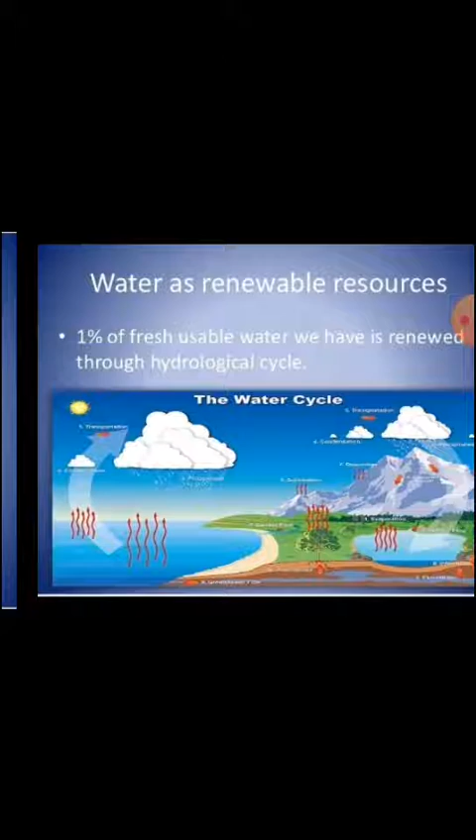If water is renewable, then the questions are: why do we talk about water scarcity? Why should we conserve water? Why is water management important?

Growth of population - certainly with the increase in population, the use of water will increase, as in domestic use, for production of food, and for other purposes like industries, etc.

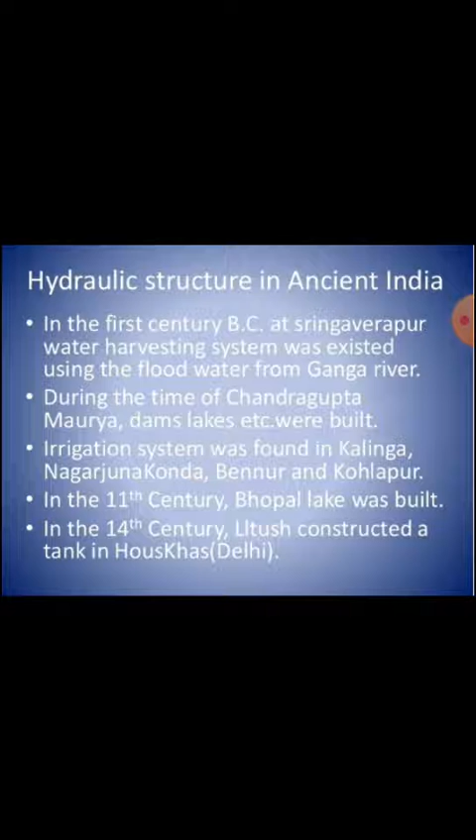Water harvesting in ancient India and water conservation - the images have been provided in the video to give an insight into how water harvesting was done in ancient times and how water was conserved.

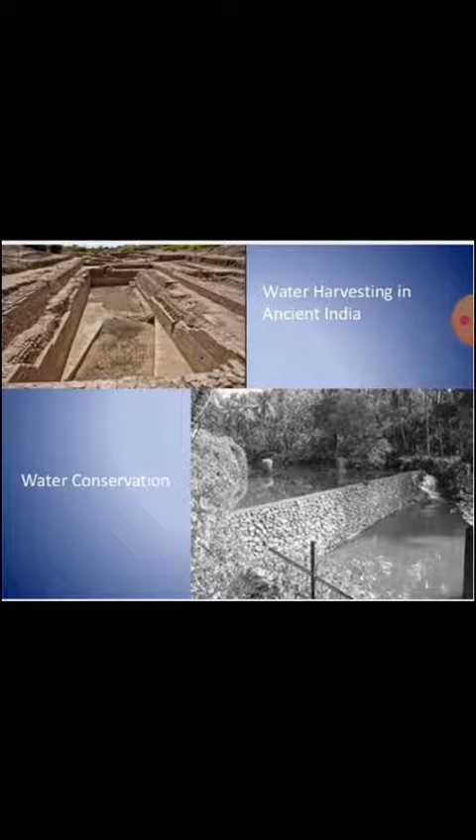Continuation of this traditional way in modern India can be seen by building dams in most of the river basins, about which we had already learnt in the previous video on dams.

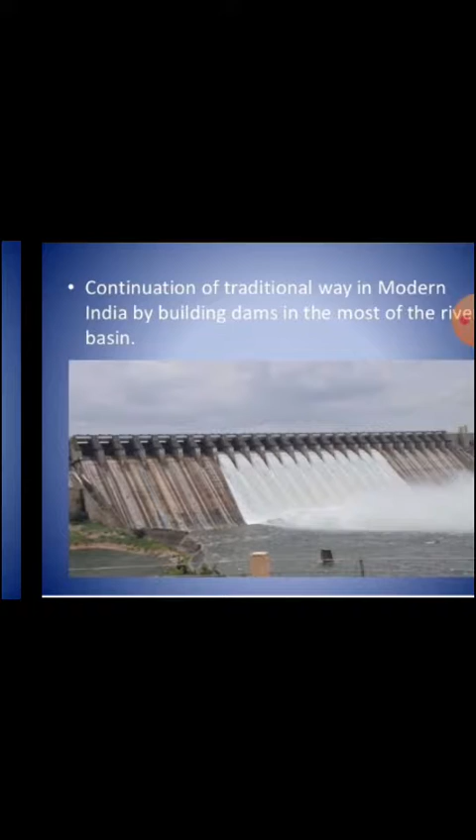Dams are multi-purpose projects traditionally built to impound water and harvest rain that could be used later to irrigate agricultural fields. At present, dams are built for multi-purpose usage, therefore it is also called a multi-purpose project.

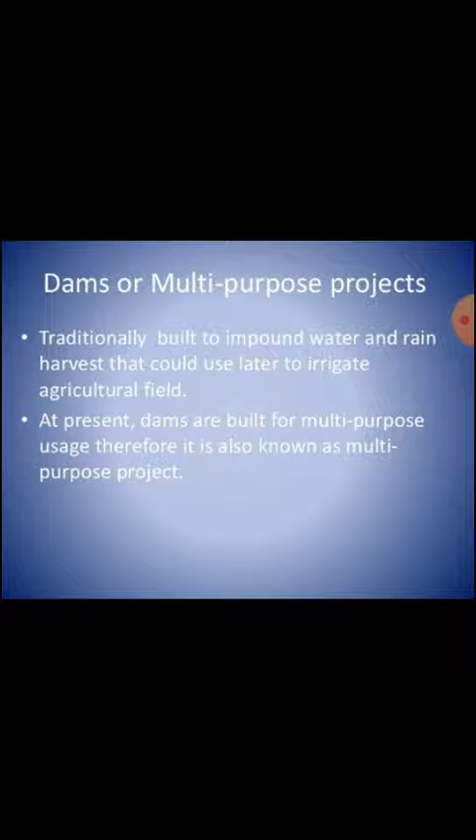But the question arises, what are dams? It is a barrier across flowing water that directs the flow, often creating a reservoir, lake or impoundment.

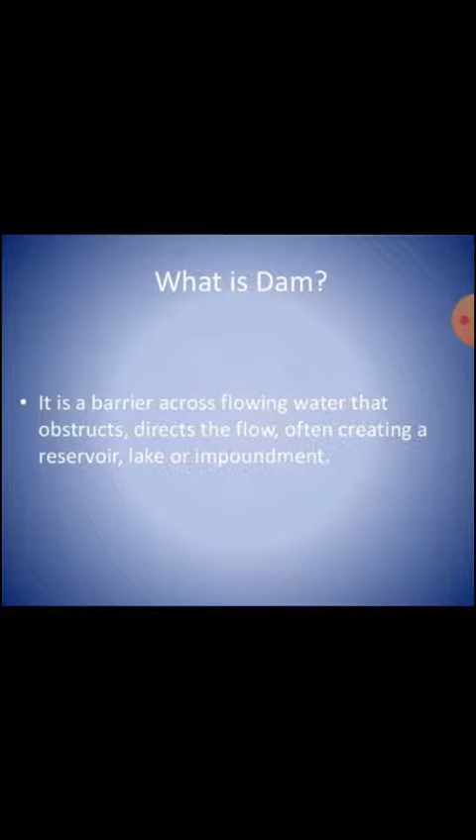That is, it is an artificial monument which is created to obstruct the path of a river and to use the water of that particular river according to our need.

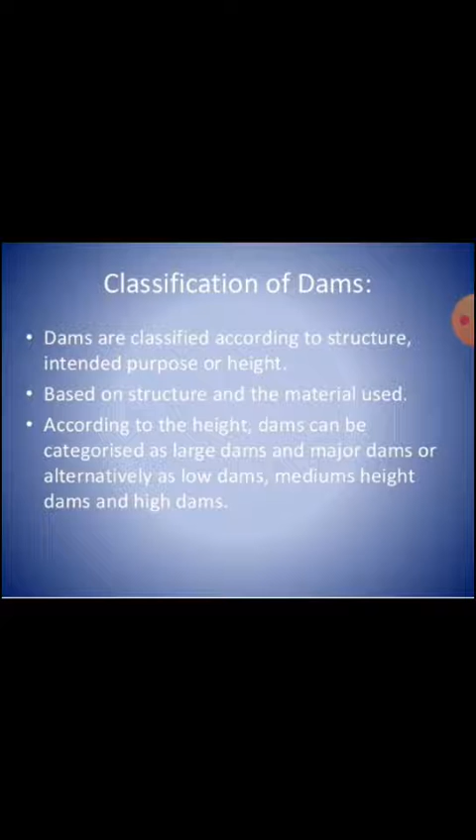Now, dams can be classified according to structure, intended purpose, or height, based on structure and material used. According to height, dams can be categorized as large, major dams, or alternatively as low dams, medium height dams, and high dams.

There are certain uses of a multi-purpose dam such as electricity generation, flood control, water supply, irrigation, and helping to promote tourism. After India's independence, dams are considered as one of the things that lead the nation to development and progress.

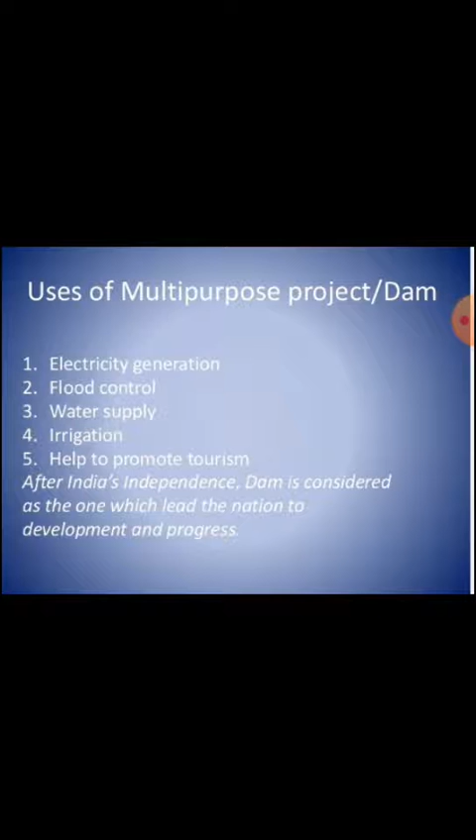The river Ganga, which has enormous water in the mountainous regions, becomes a dry stream in the scorching heat of summer season, becomes a narrow stream in scorching heat of summers. This is one of the drawbacks which a river faces.

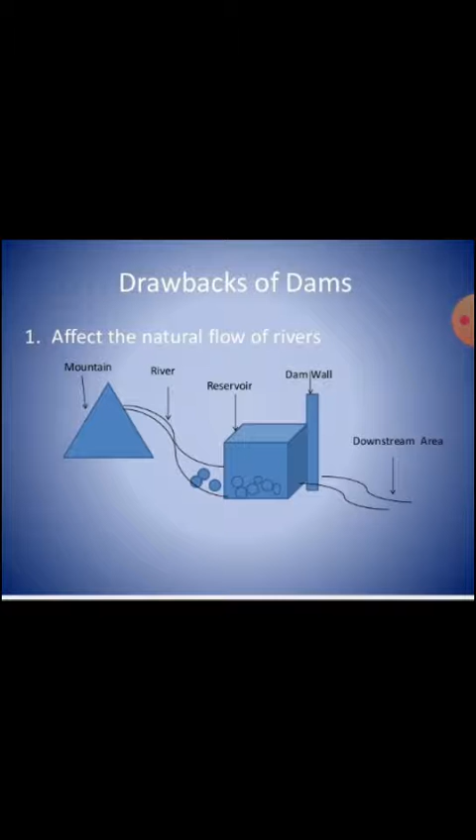Second, the dam fragments rivers, making it difficult for aquatic fauna to migrate, especially for spawning. There is degradation of forest and soil due to submergence during floods. Then the irrigation pattern can change. Cropping pattern has changed from subsistence farming to intensive farming, which has resulted in ecological imbalance and salination of the soil.

Dams silt up the soil because whatever silt the river brings from the upper course gets deposited in these dams, which results in the filling up of the dam from the bottom. Thus, without containing much water, it gets filled and causes floods, because as the base of the dam is filled by silt, the amount of water it is supposed to carry becomes less.

That's why dams which are used to channelize water in the rainy season become so flooded that most of the water has to be shed by the dams.

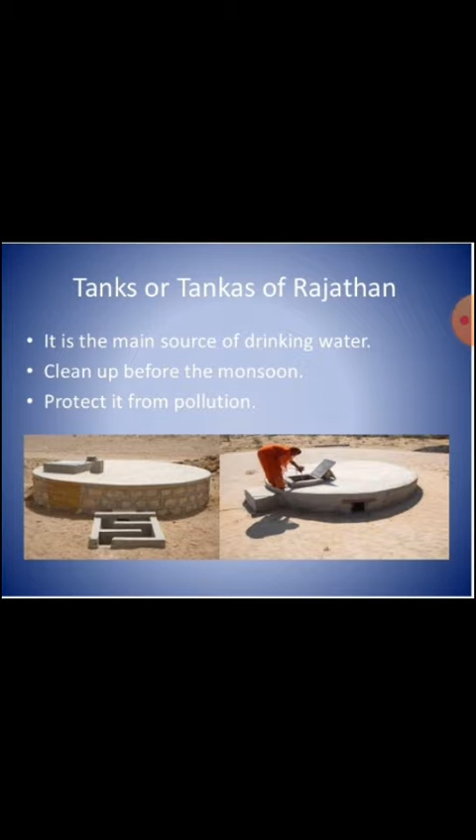Bamboo drip irrigation system: in Meghalaya, a 200-year-old system of tapping stream and spring water using bamboo pipes is prevalent. About 18 to 20 liters of water is transported over hundreds of meters by means of these bamboo pipes.

Advantages: increases crop yield with less water, makes use of natural and local material, does not need fuel or power, maintains sustainable irrigation system, soil erosion is also controlled, and saves water by allowing it to drip slowly directly to the base of the plant.

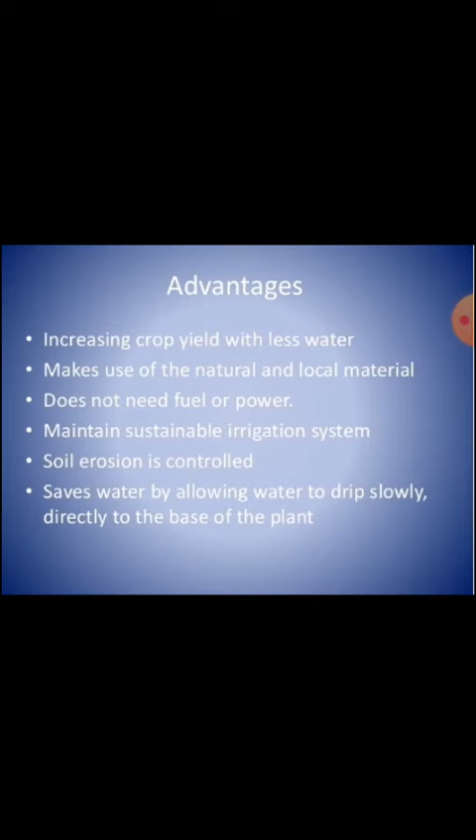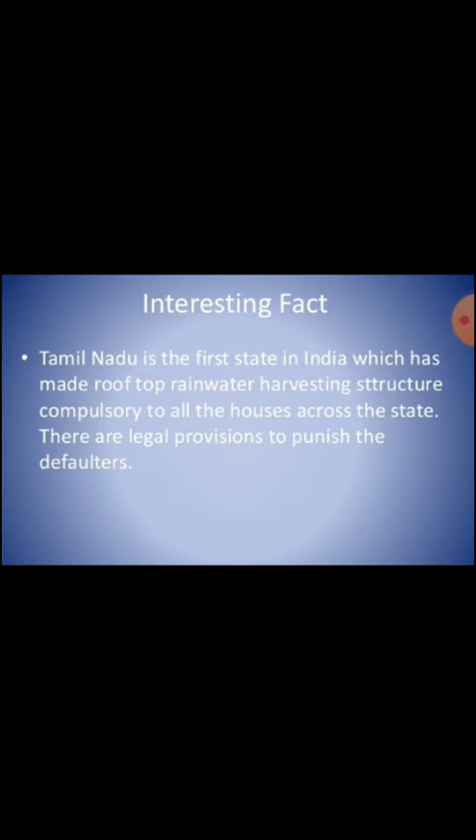Interesting fact: Tamil Nadu is the first state in India which has made rooftop rainwater harvesting structures compulsory for all houses across the state. There are legal provisions to punish the defaulters.